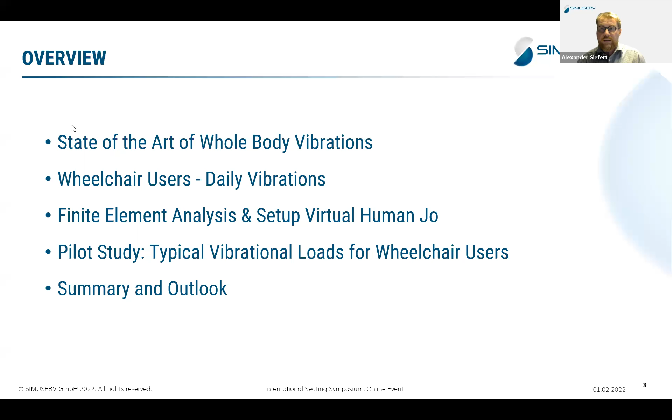So first of all, state of the art of whole body vibrations. Some general information, what is it and why is it necessary to look at that? And what are the setups in other industries? Okay, whole body vibrations occur in our daily life, in all situations we have. In traffic, when you're sitting in the car, you feel that it's a bumpy road or it's a smooth road. At working places, not all environments, not in the home office, but maybe if you're working on construction sites, you have that. And we know that from sport activities.

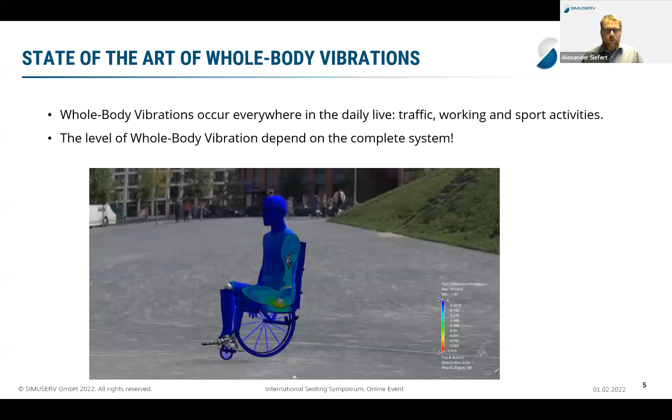And it is very important when you look at this kind of setup and how to analyze whole body vibrations, you have to cover all parts which are included. So here's a small video showing Joe going over a virtual setup. And by that, you can easily describe what is the complete system which has to be accounted for when you do the evaluation of whole body vibrations. Because here we can see all the parts of the whole system, which is first the surface profile of the road. Is it bumpy or is it not bumpy? Have we cobblestones or is it plain concrete?

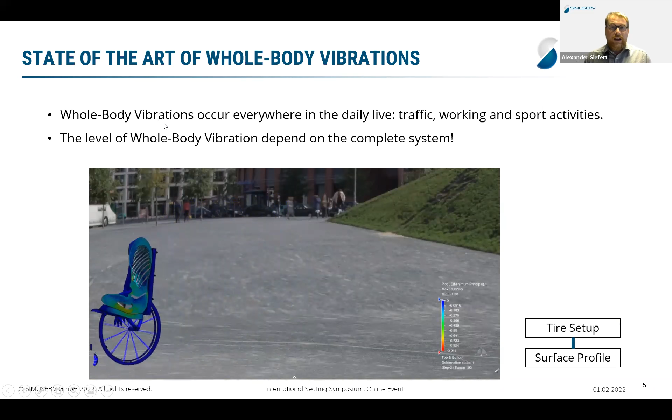Then on top, the tire setup. Which kind of tires are we using? Next, the frame. Is there suspension included? How is the cushion supported? And obviously, does the cushion itself have the capabilities to reduce the vibrations which are induced via the road and the frame? And finally, what is very important, if you do this kind of analysis, you have to include the human, because our human also has a dynamic behavior. And you cannot just put a rigid block on it. You have to put the human in to get the right level of the setup.

And when we later on discuss what we can do to reduce this for our customers, for our patients, we can focus on different setups. Obviously, as we will see in the second chapter, there are some standards defining what is a good profile for surfaces to reduce the vibrations which are induced by the pathway, for example, or the pavement. But the main part, what the manufacturers can do, is define the right tires, the right frame, and the right cushion.

Because we have obviously different kinds of humans, different kinds of customers, different kinds of patients, but they cannot be changed. The main part where we can influence the reduction of the tissue loads and the vibrations which are induced to our customers is the three parts we see here in red.

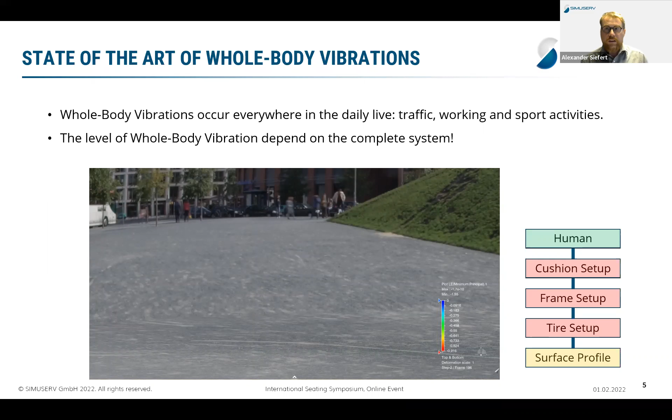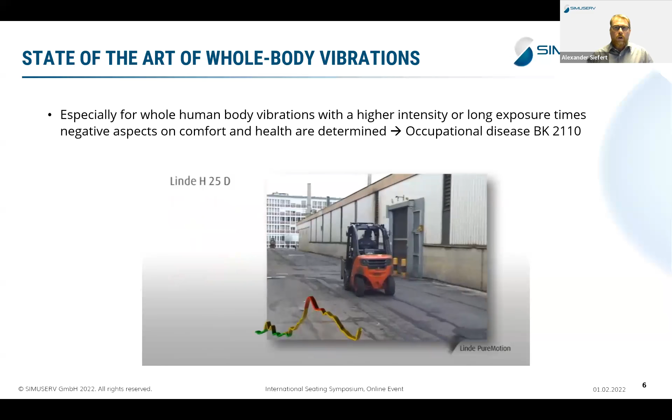So on this topic, I would say I've been in the field of wheelchair users at ISS or ESS or other conferences for about 10 years. And when I look at the exhibition stage, I have seen there are some comments about vibrations, but not too much. When we look at other industries, especially where we recognize higher intensities or long exposures of vibrations, then this is a very hard criterion for products.

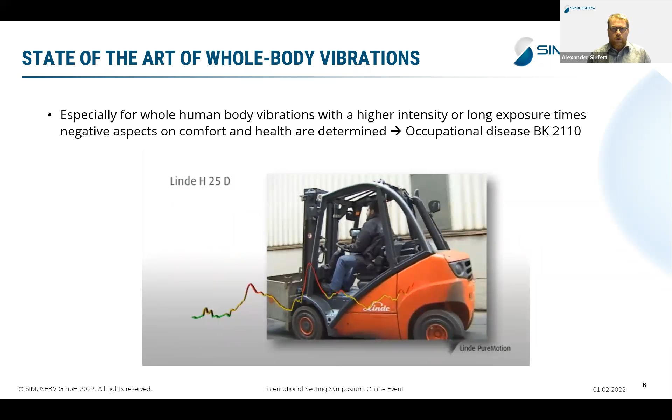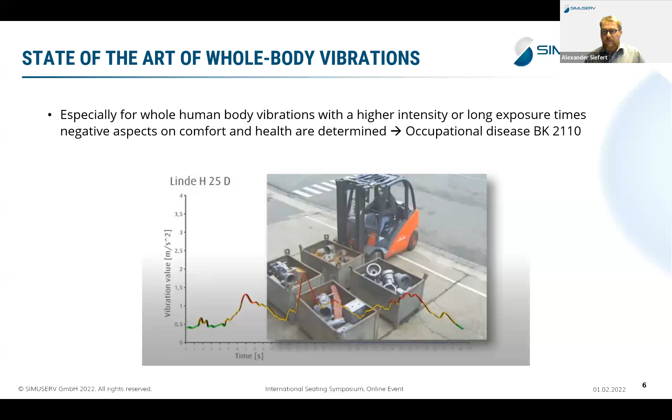As we can see here for a forklift driver, he's going over more or less a typical pathway which is normal for companies. And you can see how much shaking he has sitting on that forklift. Based on that, many studies started in the 70s, 80s, 90s, and it's known that there are negative aspects, not only on comfort, but also on health.

Especially here in Germany, based on some studies, we have recognized that forklift drivers and digger drivers have some disease, especially of the lower lumbar spine, some degeneration. And we have here in Germany an official occupational disease, BK 2110, where if this comes from your working environment, you get some money from the insurance company. I'm not really sure what the state is in the US or other countries, but I think it's the same for you too.

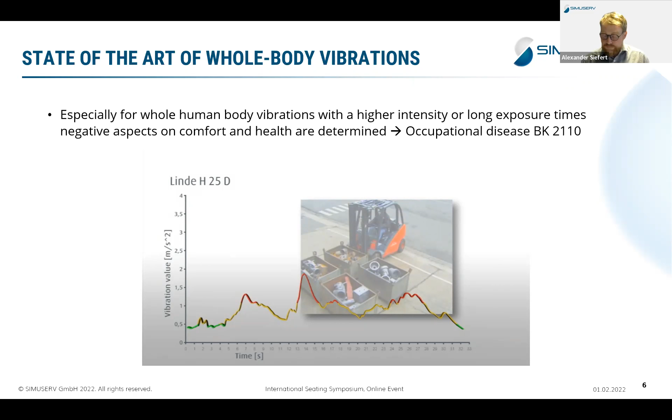Based on that, the EU, for example, has introduced some standards. In 2002, they introduced directive 2002/44/EC, and this defines a procedure for how you have to evaluate a working environment to make sure that your employees are covered against these negative health aspects coming from vibrations. And obviously all the manufacturers have to do that because they are selling these products and have to fulfill that.

So what is typically done in this procedure evaluating vibrations? Here we see a setup of a forklift, and you can see they measure the vibrations on top of the seat surface with a seat pad. A seat pad has a diameter of 200 mm. It's a rubber-like material, and in the center of it we have a small acceleration transducer, located here where we have the coordinate system. It measures in the specific area of the working environment where we have vibrations.

This acceleration data is post-processed with some filters on top, but this doesn't matter. So you have the right value of the vibrations at your working site. And then you have to combine that with how much time in an 8-hour working day your employee has this level of vibration exposure. If you have these two combined, then you can do the evaluation based on the standard.

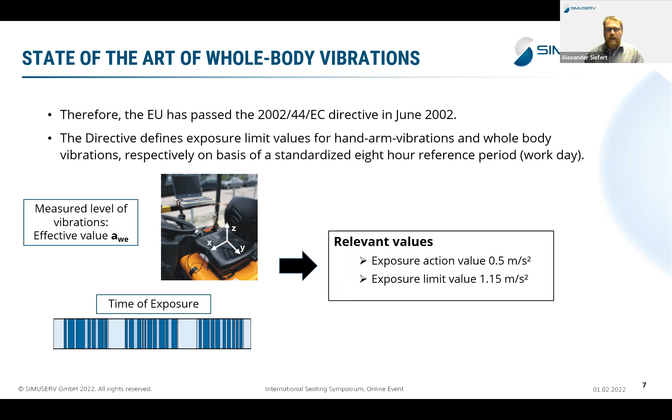And there are two limit values. The first one is called the exposure action value. It's a value of 0.5 meters per second squared. This means if you're below that, it doesn't matter what happens over the whole day. You don't have to do anything, no limitation on hours in that vibrational environment. You are fine. If you're above that, then the 8 hours are reduced based on the standard.

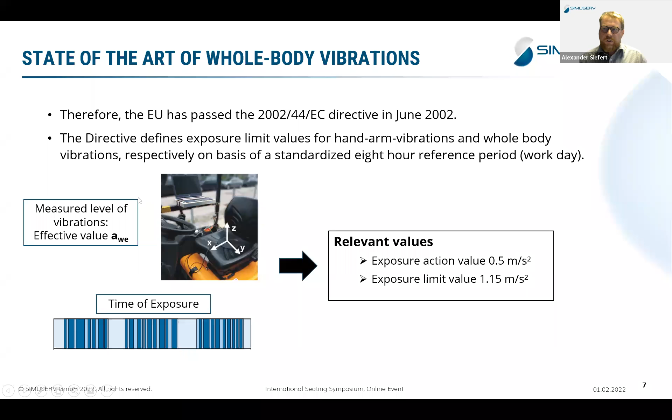The second part is the exposure limit value. It's about 1.15 meters per second squared. This means if this is occurring, then you directly have to do something against the vibrations, because it's known we have negative aspects. So you have on the one side the vibrational level, you have the time of exposure, and based on the standard, you get a plot like this.

We see here the green part, you are safe, the red part, you are not safe. On the x-axis, we see the time of 8 hours, and on the y-axis, we see the measured acceleration. So as I mentioned, when I have a value of 0.5, I have a green light up to 8 hours. If I'm above that, I have to reduce my exposure. And this is how you typically do it in this kind of vibration environment.

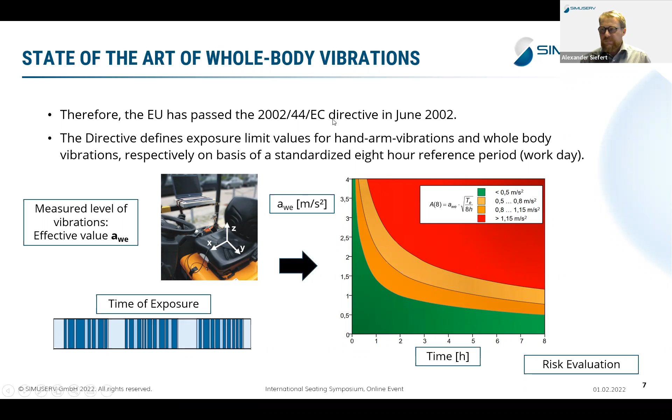So the question is, is this somehow useful for us, and how can we convert that information? There have been some studies, and this is where I come now to the next chapter about wheelchair users' daily vibrations. So I looked around in the last years at what studies have been published, and I really have to emphasize the most relevant work I found was the work of the University of Pittsburgh.

There have been several publications, and for my pilot project I was mainly referring to a publication of Wolf from 2007. You see the reference on the bottom of that slide. He investigated with different test persons 9 different pavements, which we see here. It's a poured concrete, which means a plain concrete, and then different pavements with different levels of joints, meaning the spacing in between.

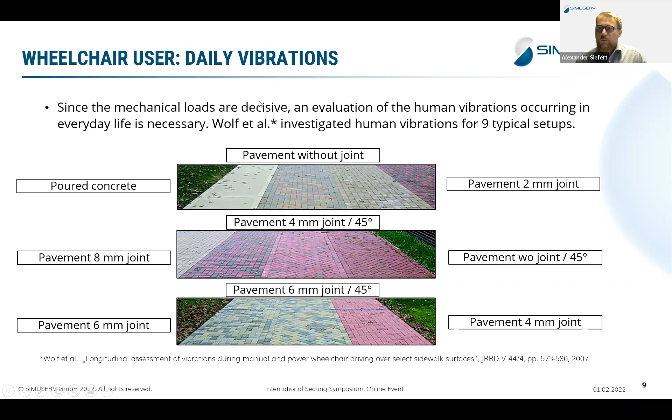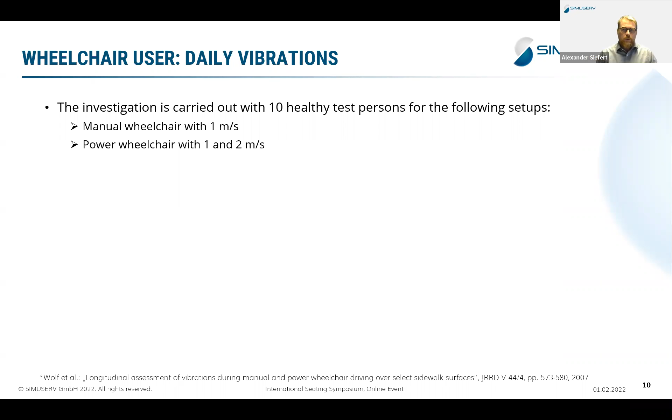And then he investigated these 9 typical setups with 2 kinds of wheelchairs. On the one side, he was using a manual wheelchair with a specified speed of 1 meter per second. And then they also investigated, with the 10 healthy test persons, a power wheelchair setup with first 1 meter per second, and then they doubled the speed to 2 meters per second, just to see the influence of increasing the speed. And most probably you already know what's going on when you increase the speed. And here are the results.

Taking into account what I mentioned before, the acceleration values here are called root mean square values. This is a specific post-processing of the time domain signals of the accelerations. When we look at the different setups and remember the limit values we have, 0.5 and 1.15, we already see that for the manual wheelchair at 1 meter per second, we have different states where we are above the action value. That means if I had 8 hours of this in a working environment, I would have to reduce the hours.

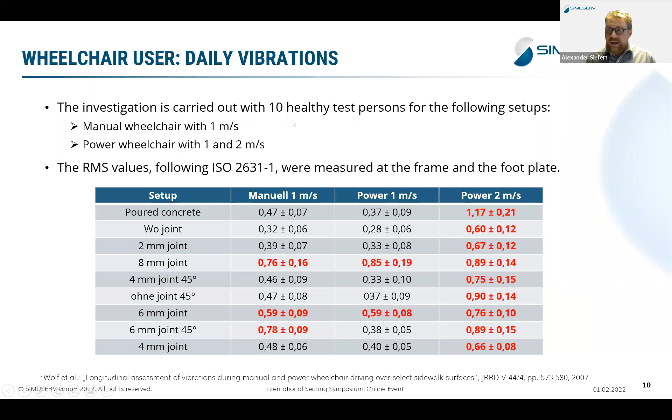And when we look at the power chair, especially at 2 meters per second, we see all of the pavements are above that. So that means you are directly not allowed to do that for 8 hours. Obviously, patients and clients will not do that for 8 hours, but you already see the daily vibrational exposure is not really low. We have to take that into account. So we see many daily setups are exceeding this action value.

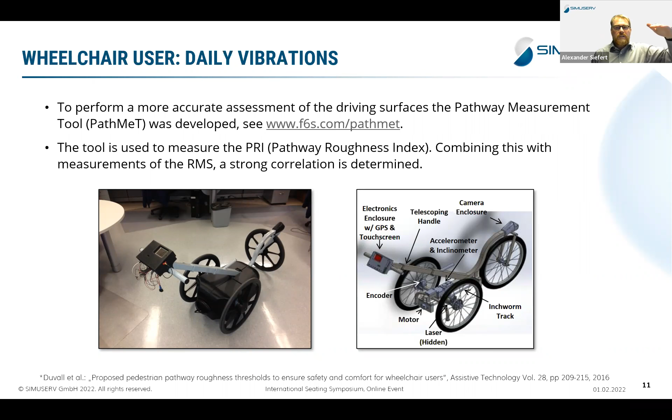So, based on that, they defined a roughness index, which describes how rough my pavement is. The goal of this study was: if I have this pavement and I can correlate it to an acceleration value, then I know my limits for acceleration values. I can also refer that to my pavement roughness and say, okay, this is a good pavement roughness. And this is what they did, as we see in the next 2 slides.

Here are some examples. The pathway roughness index, the PRI, is the vertical displacement of a wheel when running over a horizontal surface. The wheel goes in this direction, up and down, and this is how many millimeters of height difference you have per 1 meter. Here we see some examples of different setups: standard pavement as we have it everywhere, then a more concrete setup but with some bigger gaps, which is more or less an obstacle. We directly see that the PRI value increases from 30.7 up to 62.2. And finally, this was maybe some years ago a pavement like we see here on the left side.

After a while, a pavement is losing the setup, and based on that, you get a higher PRI value, which is here in this case 74.1 millimeters per meter. These are typical values, and at the same time they did the measurement of the RMS value, which we used for defining the exposure limit value, for example. And they found out there's a good correlation between the pathway roughness index and the RMS acceleration value.

Based on that, there is a new standard in the US, the ASTM E3028, where they say we have to make sure that for a new pavement, we should normally not come above 50 millimeters per meter for new designs. The idea behind that is, following the EC standard, the European standard, this would allow us to travel over this pathway for 60 minutes, which is maybe an acceptable time over the day.

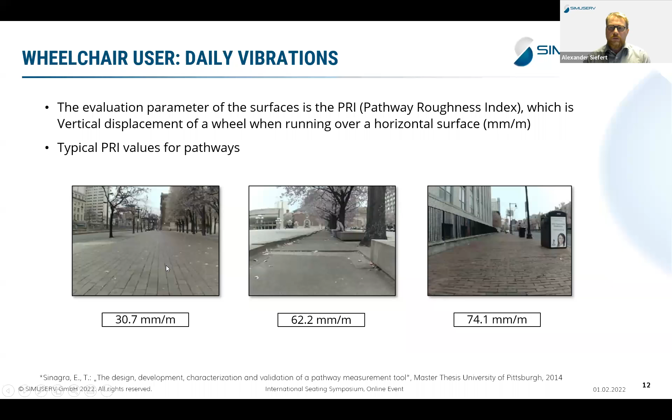But the question I have: if you do that design, what happens over the years? We have seen the two examples, going one slide back, on the left side and the right side. I would say after some years, this will change. So what happens after a while? I would say it's fantastic doing that and specifying that, but what happens after years?

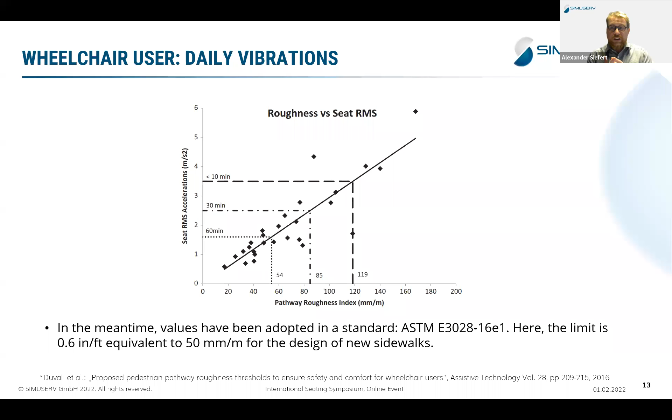Further, we're talking a lot about acceleration values. When we talk to customers, when we do evaluations of cushions, we normally don't talk about vibrational values or accelerations. We are talking about pressure. Sometimes, if you have a more sophisticated approach, we're talking about tissue loads, tissue strains, but not vibrational loads. So the question here was, what does this kind of vibrational load mean regarding tissue loads? Is this useful for us? Is this enough information? How is the transformation to our risk evaluation, normally based on the setup of pressure injuries?

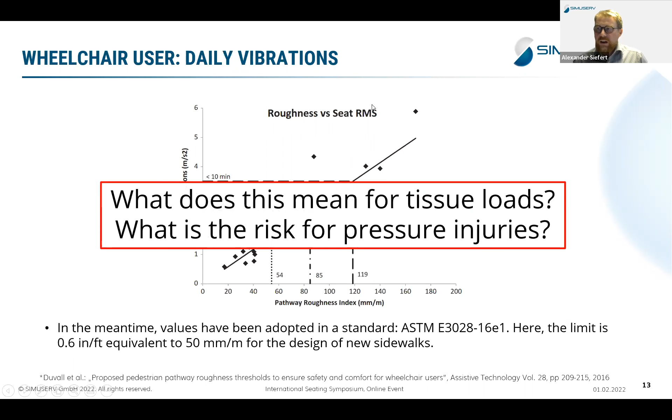For this, we carried out this pilot study. First of all, I will introduce the finite element analysis, our approach to get a more detailed investigation of the setup, and then I will tell you something about our setup of the virtual human, which we introduced in this analysis. If someone has joined one of my presentations at the last ISS or has seen a talk of mine, you maybe know this setup. Finite element analysis is a standard calculation tool used in many industries for simple or complex cases, as we have here, to evaluate designs.

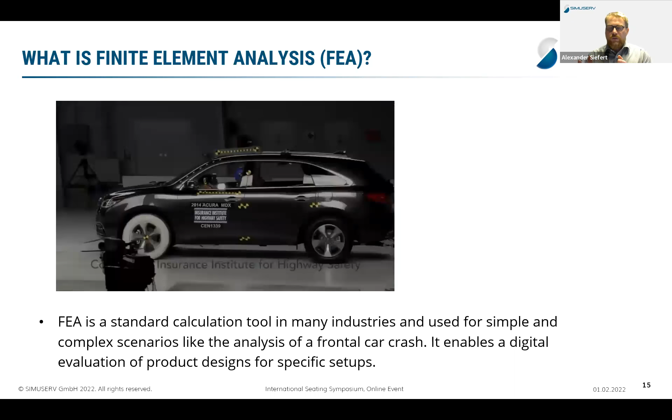In this video, we see first, starting now, a real car crash. And the second part is already virtual. What is the benefit of virtual? We can see at every second how the structure behaves, which column fails, where we have to increase material, where we can reduce material, where we put more stiffness. So the benefit of FEA is it's virtual, we have no hardware. You can imagine for this kind of setup, this is really costly.

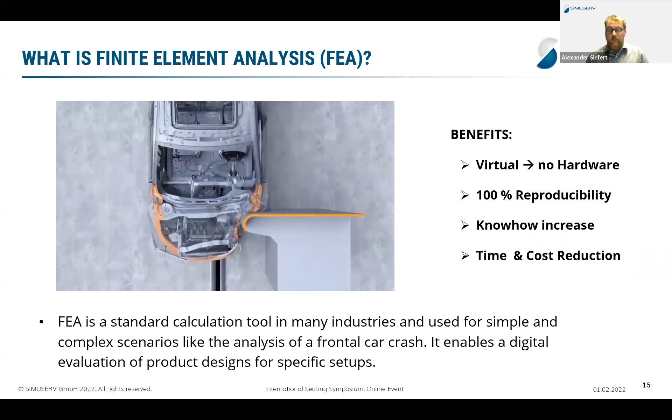Hardware also means if you have a new wheelchair design or a new cushion and you want to change that, you don't have to produce it. You can do it virtually, and then say, okay, if this is fine, then I will produce it. This is a general benefit. Another benefit, maybe you are aware of, is you have 100% reproducibility.

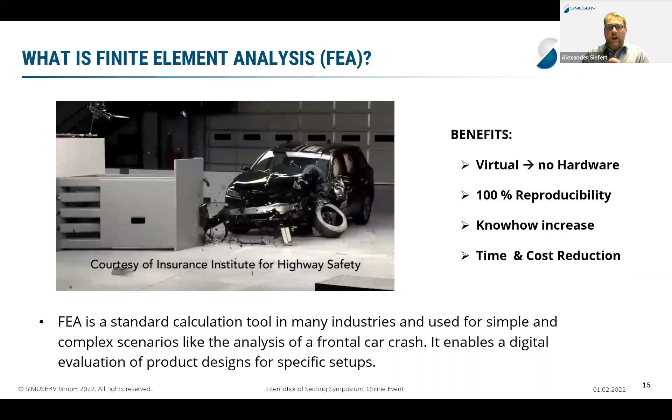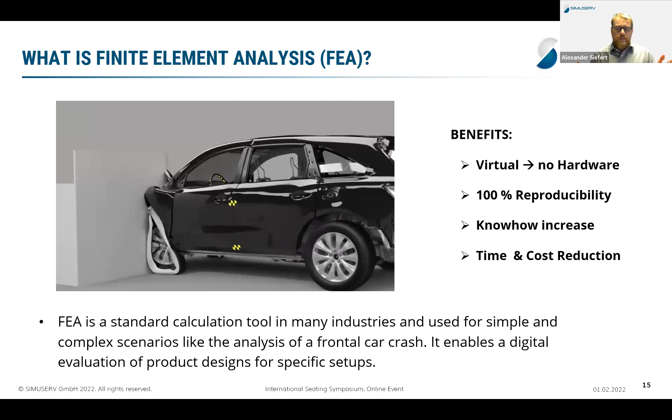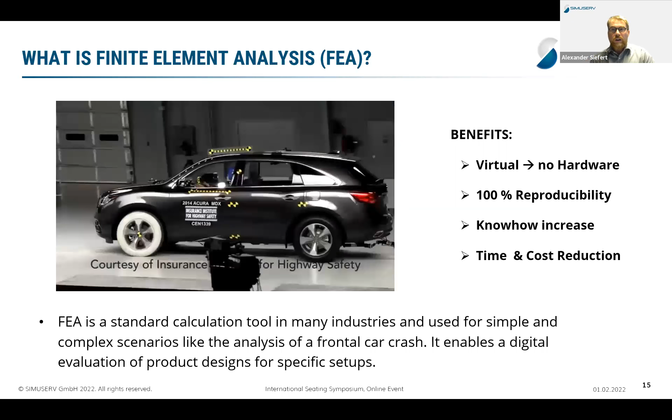Let me make a simple example. You have a customer and cushions A and B. You do the cushion A test before Christmas and the cushion B test after Christmas, and then you have differences in the result. This is an example I used many times in the automotive sector, because we know we change a little bit over Christmas time. The question is, when we changed weight, when we have been skiing, when we got more relaxed, will this influence the results between variant A and variant B of the cushion? Yes, it will. So in real hardware setups with test persons, you don't have 100% reproducibility. Here, if I do the analysis again, I will always get the same result.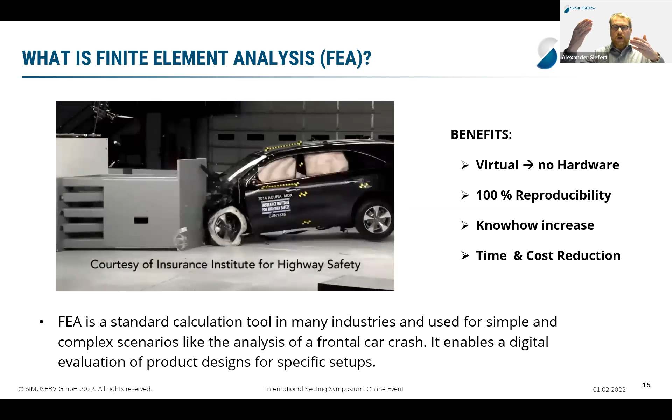If I change something in the setup, I will see a difference. So that means I get a direct correlation between change of the setup and the results. And this makes it very easy to see, okay, this is a benefit or is not a benefit.

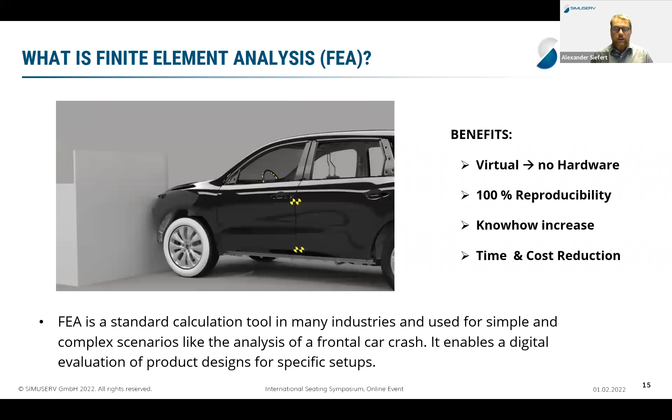Further, as we can see here, and you will see that hopefully later on and understand it, we can somehow increase our know-how using that kind of virtual tool. And finally, less hardware means reduced time for setting up a new system, and this means obviously reduced costs.

So when I look currently on the status, I see, okay, we have many standards which are specified by indenters. Also, I know manufacturers are doing test setups. And just looking what I described before, which works, which does not work. I will not say that I directly want to exchange real test persons with virtual world, but I will just show some parts where I think if we combine that in a good manner, then we have a benefit for everyone, for us.

So reproducibility for the ISO standards with the indenter test, yes. For test person's test, this is not a real test person, but this setup, not really, but it's a real case. It's a real case if I have the right person here. This is more or less, I would say, no one of us has a rigid buttock, so this is not really a real scenario.

Evaluation quantities: we have pressure maps, yes, but if we have not the right buttock, what we take out as a message of that? It's just information about how the cushion behaves with a rigid indenter. It's nothing about the interaction between the human body and the cushion.

And very often we look here on force deflection curves. This is a global value, but sometimes it's more interesting to look on local setups. Digitally, not really the case, although this is very simple to do as a digital setup. Time and costs depend: if you are fast in hardware manufacturing, obviously not a lot of time, not a lot of costs. If it takes a while to make a new setup, then you have really some problems about that.

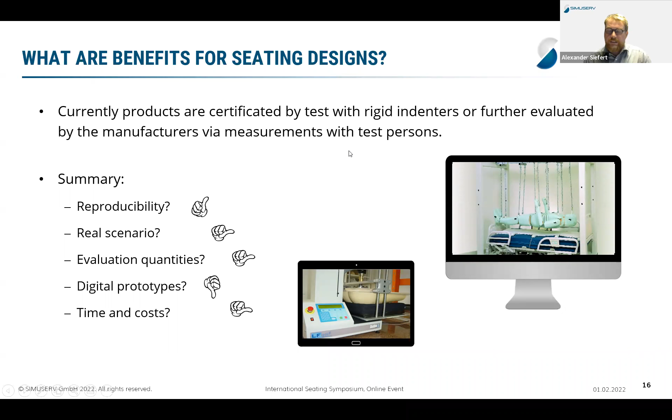Okay, so then I did a small example just this Sunday morning, just to explain a little bit more. Okay, what can we do? I just did a foam setup, a cubic foam setup, 50 millimeters height, and just put on top the ISO indenter. I just want to explain to you, okay, what could be the benefit? And this was an amount of hours for me, 1 hour.

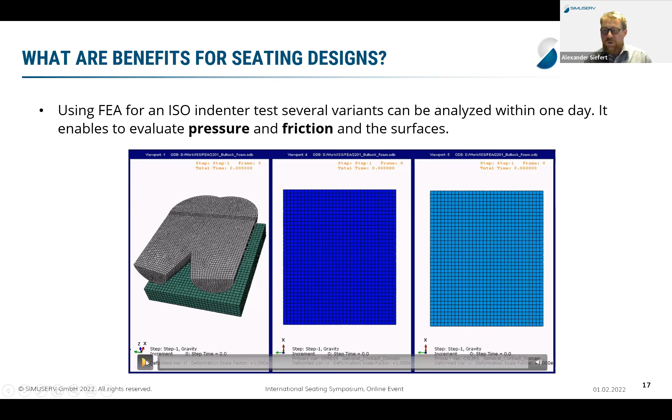I first just applied the 800 newtons. And then we looked here in the middle, we look at the pressure map, you say, okay, nothing new. I could also show you a force deflection curve, nothing new, we can do that. But I can also look on the friction.

What means the friction between the indenter and the setup. We have some specific ISO indenters with some specific sensors. This is correct, but we have not a resolution like we have it here. I can do really resolution similar to our pressure map resolution, just showing you the friction. This is very interesting when we look, for example, at the IT region.

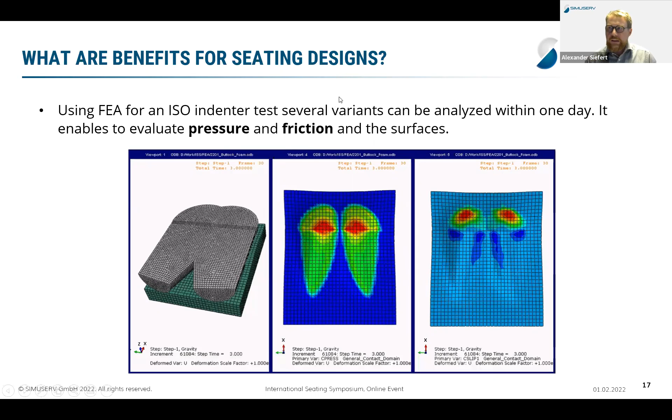And another thing I did, on the left side is the typical foam block. And then I said, okay, let's see what happens if I cut the foams, because there are many setups out there. Doesn't matter if it's an air cell cushion or a cut foam, where we have a change regarding that. And I just did the same test, first loading vertically, and then I did a horizontal movement to see what happens to the cushion.

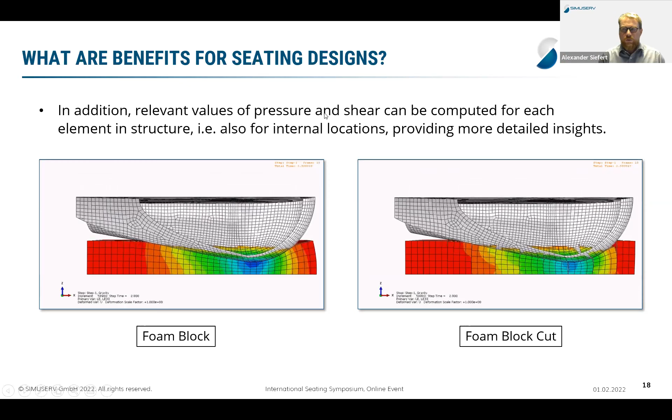And this is a cross section at the sagittal plane. This is what I say, okay, I can directly look inside how the cushion behaves. On the left side, the typical foam block, it's not really difficult to understand. But on the right side, this is also done within 1 hour, you directly see, okay, how the blocks behave to each other.

And I can easily change that to make the blocks wider, smaller, change the geometry. So a lot of possibilities. And this is what I say, there are manufacturers out there who have this kind of setups, but I think they have an idea how it works, but they have not really the background, the mechanical information for that.

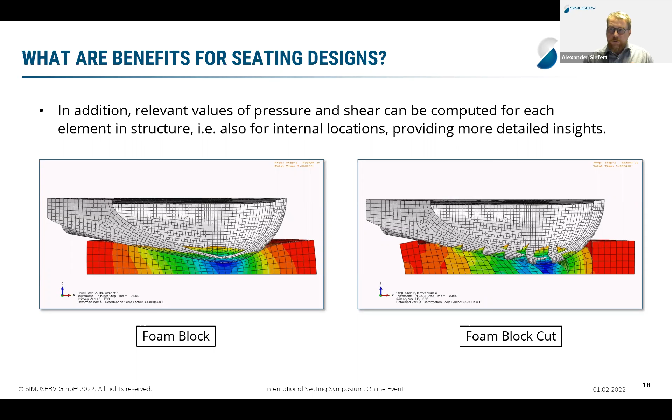So this is a benefit, an easy example on the ISO standard test, where you can see finite element brings you an additional knowledge.

Then I come now to the human body model Joe, which I use. It's presenting a healthy person, I'm clear this is not the real patient, I will tell something about that later on. It's a male, 50th percentile, based on a CT scan for skeleton, MRIs for the layer setups, body scans for the outer surface. We have some additional information for the tissue, and that's the general setup.

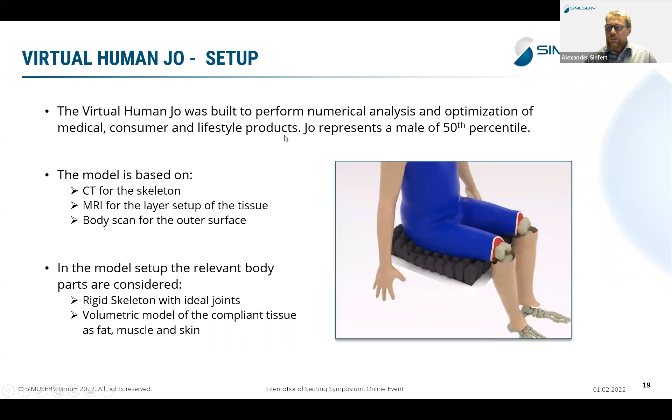And here we see it in interaction with one cushion. So, what is important when you do that model?

The modeling, especially regarding vibrations or seated setup, needs a very accurate model of the tissue, but especially a very accurate modeling of the lumbar spine, because the lumbar spine is where we have the trunk, we have the head, and all the load typically in a seating process is transferred by the lumbar spine to the pelvis, and the pelvis is finally the supporting part. So I would say it's the main load transfer column we have.

And it's also very flexible, especially the lumbar spine, so we really have to model that in a very specific way. I will directly show you in one or two slides why it's also important to have a specific detailed model for the analysis of the dynamic setups.

Another point you have to consider is muscles would be nice. If you don't have the muscles, maybe you need some belts to keep you in place. If this is not the case, you should take into account in the modeling some muscles.

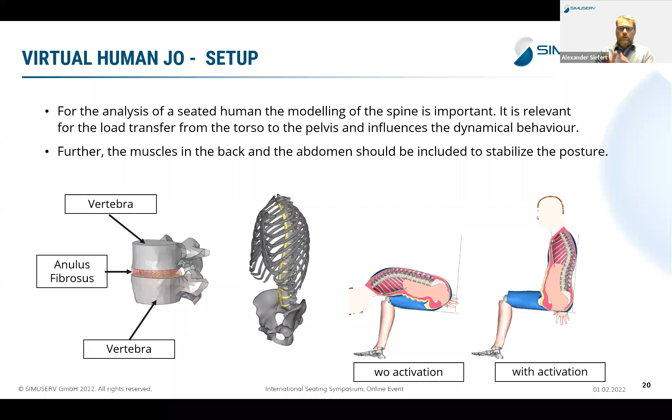So this is the model. I have only modeled some of the back muscles, some of the abdominal muscles, without any activation. This is just showing the same model with some activation to keep the neutral shape we have for the spine, and you can vary that. So this is another point you should normally consider.

What you do with this kind of modeling setup, you have to validate it. Obviously, the first setup is validation by pressure map. Here, comparison of 9 male test persons in a range of 74.5 plus minus 2.6 kilos. We see the pressure maps, and on the left side this is the result of Jo. I would say this is an acceptable result, so we can start using that.

We did also do some further quantification validation when we looked at the lumbar spine. There's some data when you do just a segment L4, L5, how much is the deflection, and this also works fine. It shows a good correlation.

So coming now maybe to the comment, okay, this is a healthy person. You're right, the difficulty is with our patients in this industry, it's difficult to get data, difficult to get the right setups. And then if you model one of the patients, you have only one specific patient. And the goal here for this setup is not really to make an individual setup, but to have some general recommendations if a design works better.

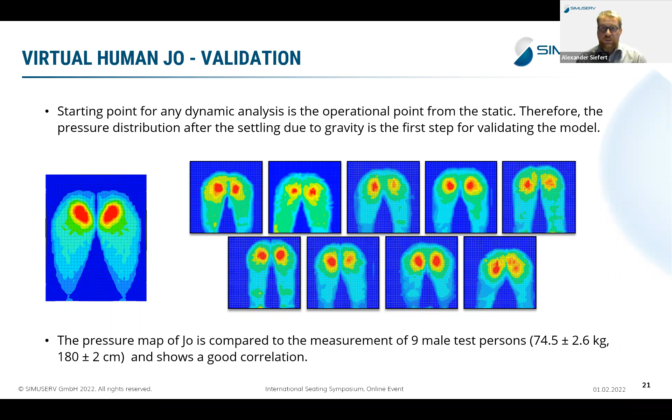Because if I can show for a healthy person that the vibrational level is reduced, I can also say, okay, I assume this is also the case, maybe not the same amount, but I can say this design is for this setup better. I assume that's also for our patient better. And that's the idea - hopefully in future it's getting easier to get some data of the patients and to develop some patient-specific models.

Coming now to the difficult part, and here you can see I'm an engineer. I'm sorry for that, but that's our nature. So, equations.

I described the whole system, and I said you need the human body on top, because the human body has some kind of dynamics. And it's known there's a value which is called the apparent mass. The apparent mass is a good value describing our reaction to applied body forces.

What we see in this slide is a test rig at the FIOSH in Berlin in 2008. They applied some forces here to a rigid plate - actually they applied some accelerations, not forces - and then they measured the reaction forces on the force plate.

And based on that, they defined - normally, force equals acceleration times mass. They said, okay, we will convert that to mass is equal to force divided by acceleration. And they found out it's very well known that individuals of specific percentiles have very similar characteristics.

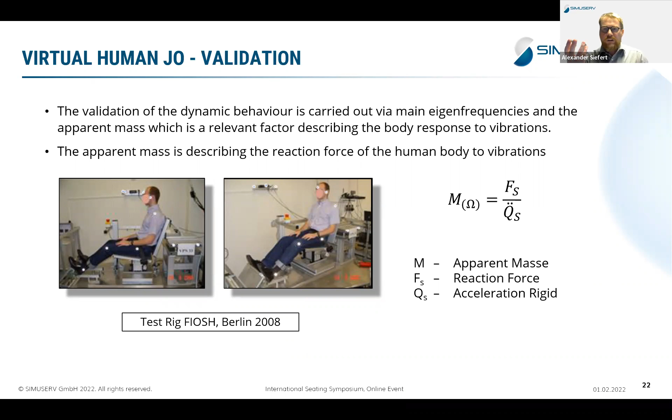Therefore, it's really important, as I said, that you need a detailed model of the spine to cover that. Because if you had a rigid block here, you cannot assume that when I put it on top of a wheelchair I get a realistic result compared to when a human is really sitting on a wheelchair.

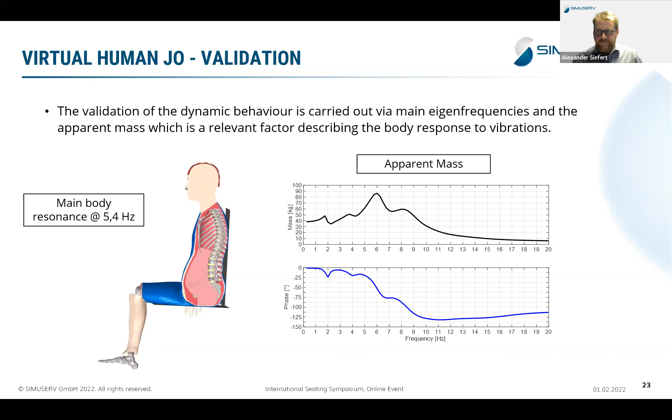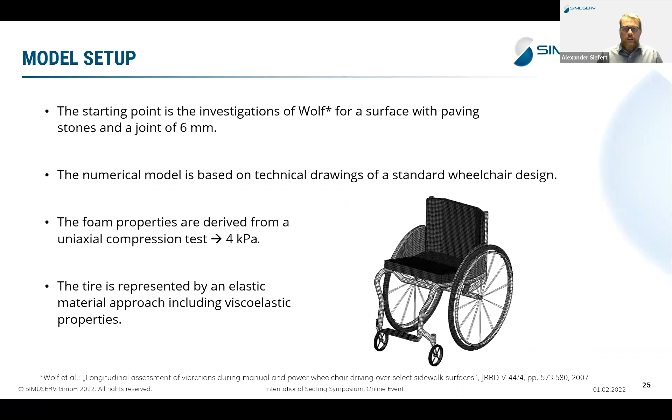So, enough of theory, now going to the pilot study. The goal was to do a setup somehow similar to the measurements of Wolf, then use finite element analysis to see if we are close to the vibrational levels, and then focus more on tissue loads rather than accelerations. First, we modeled a manual wheelchair based on a technical drawing, with standard foam, nothing specific. We're not highlighting any products here; we just want to get knowledge about what works and what the benefit is for us.

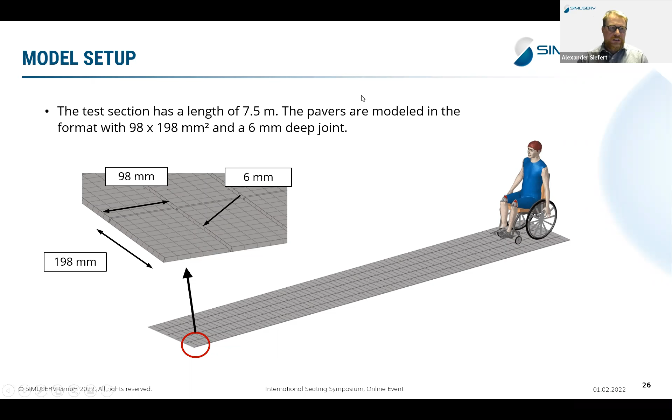Then we modeled a pavement like we saw by Wolf, typically stones with a width of 200mm, length of 100mm, and a 6mm joint. This is one of the setups. We modeled the pavement with a length of 7.5 meters, then sped him up, first letting him settle down.

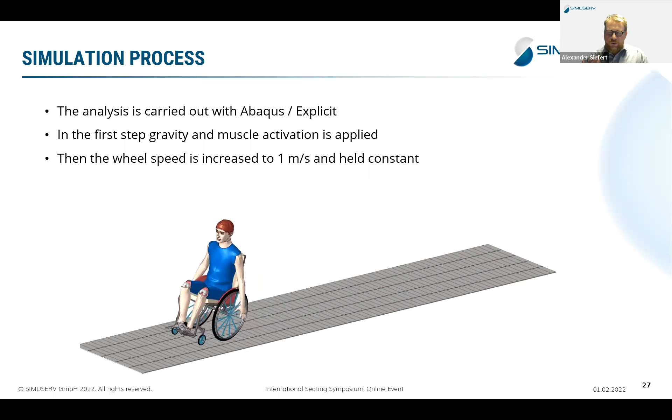For this analysis we use Abaqus Explicit. We let him settle down - at the beginning the wheels need some friction to start. Then we speed him up to 1 meter per second and keep the speed constant as he moves over the pavement. This looks very close to what we see in the measurements of Wolf.

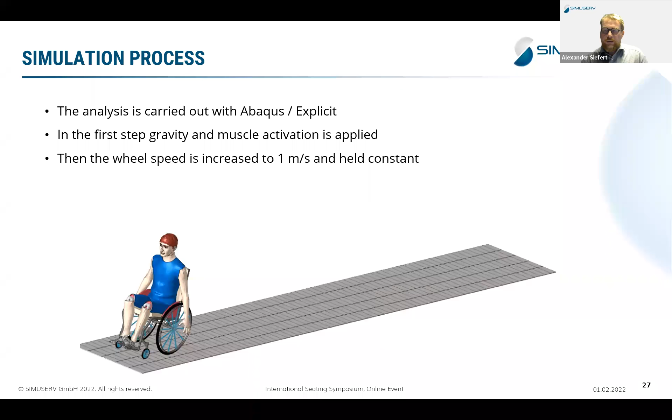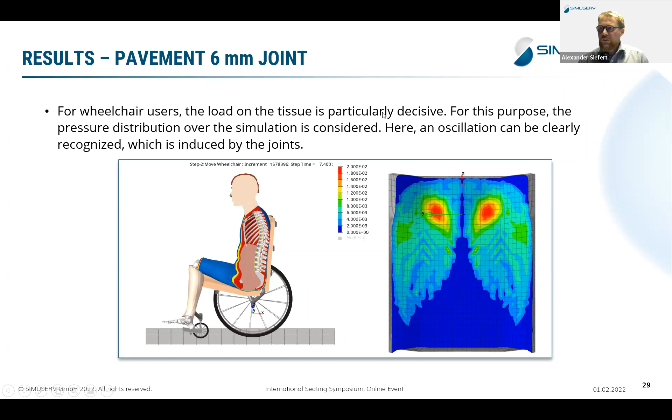So what does it mean for the tissue loads? And the question was here, we see there's an oscillation, and when you normally have an oscillation, this means you start from a point and you go up and down and up and down. And the question was, okay, when we look on the pressure map, how much are we going up? And this is just comparing here on the left side, the static after we settle down due to gravity.

And on the right side, we see, hopefully it's correct. Yeah, I will just show it by the mouse. This is the maximum of 6 millimeters. And this is after the static loading, just applying gravity. And we see it's an increase from 1.7 to 1.97 newtons per square centimeter. I will just convert it to typical values for you. This is about 150 millimeters of mercury. And this is about 130 millimeters of mercury.

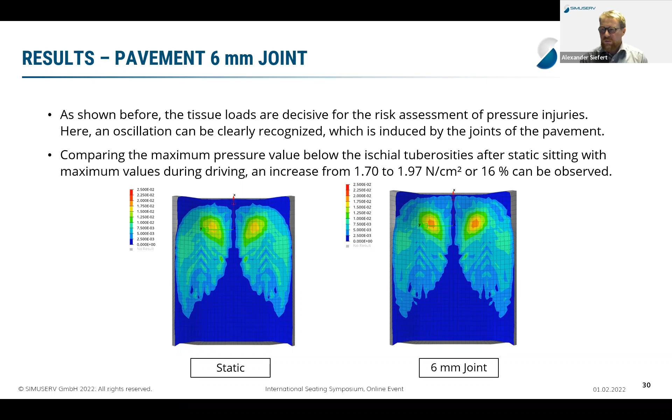So it's a difference of almost 20 millimeters of mercury, which is, although we have a very low vibrational value, an increase of 16%, which is not really a small difference. So then, I said already pressure mapping is no problem. On top, we did some computation of what's going on with the internal tissue. So we have a possibility that we can compute at each setup the tissue load internally. And you can see that this is the settling down process, and we call that volumetric strain distribution.

When I stop that here, so let me just go here. I will stop that finally. So this is after settling down of gravity. And then internally for each part of the volume, I can say, okay, you have compressive strain of that amount, you're going to this range, or that. And then I can separate the volume, and we focused here on the IT area. Okay, how much of the volume is in a specific threshold, which is critical? Because there are some critical values.

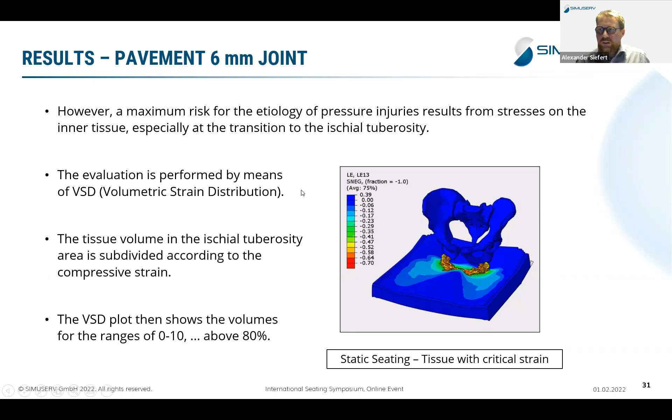There are some studies of Willeke of 2018 that say, okay, below 50% of strain, no problem. With some tests between 50 and 80%, this could lead to necrosis, but we are sure if you're above 80%, then directly in a short time you have some damage, which is not even reversible for the tissue. So this is the point.

And what we did for each state, settling down, then we did how much of the volume is between 0 and 10, 10 and 20, 20 and 30, 30 and 40, 40 and 50, 50 and 60, 70 and 80, and above 80. So we compute for each setup how much of the volume of the tissue is in these different strain ranges. And then we can really give a value.

And based on that, when we now compare the two designs to each other, we've seen, okay, it's only 16% or 17% of increased pressure peak. But when we look internally, we see it's much more, especially for the critical range. So maybe the pressure setup is not enough information. If we use that, we can really see this is much more critical than the previous setups. And this helps us get a better understanding of the risk of the vibrational loads.

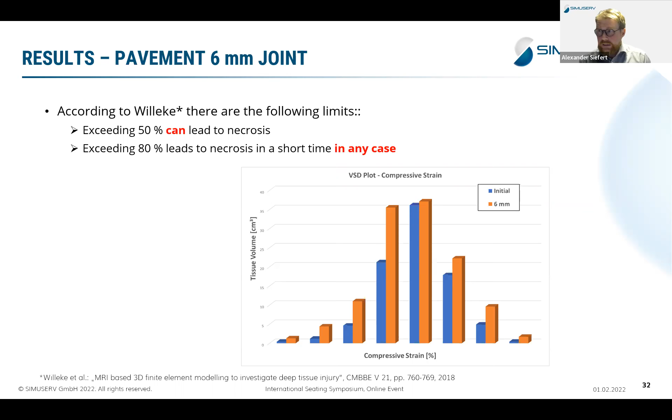This is just a summary. And the comment is we have 0.31, no action, but still we see here a strong increase. So what does it mean? Is it not covering the risk? Should we do something? And this is a point where I would say, okay, we need some deeper insights and we can then make a decision, okay, let's look at the design and let's improve.

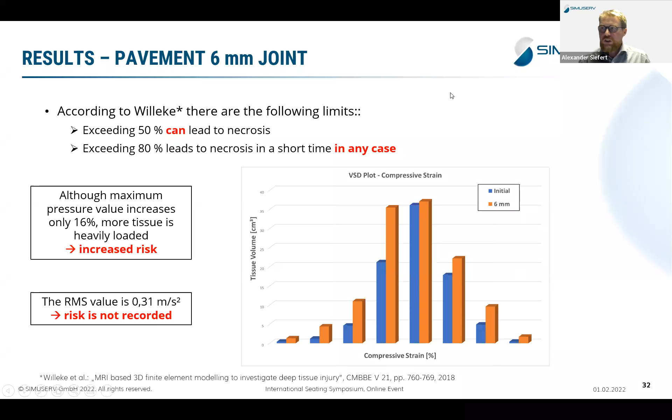But this was only the first part. We were then interested in what happens when we changed the vibration. We did 3 additional cases. We put some cobblestones. Maybe you remember we had this loose pavement with a IRI value of 70, 47.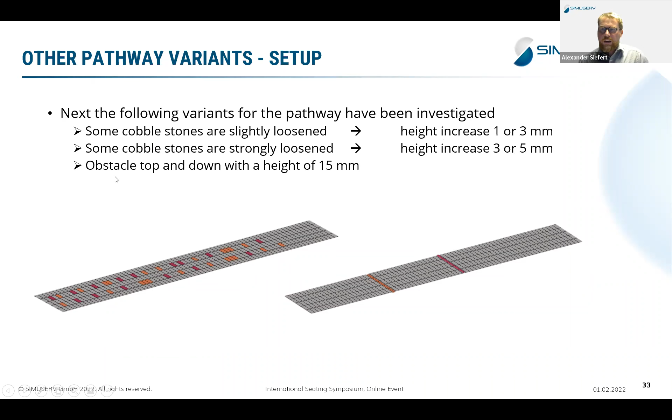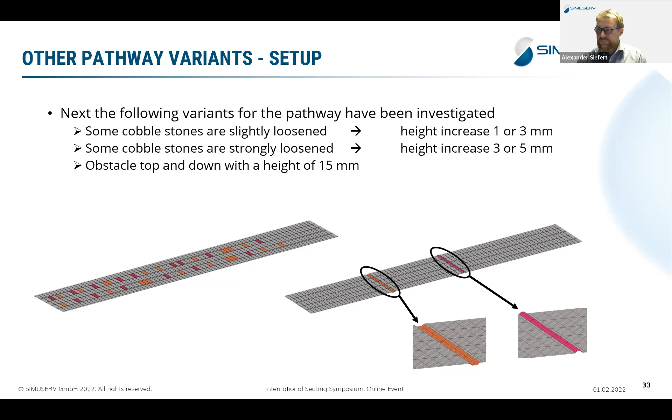You can see that here in detail, our obstacle which is going 15 millimeters up and another obstacle which is going 15 millimeters down. So this was maybe the example of the pavement we have seen in the middle of the previous slide. And here this shows now, once again, a cross section. Cobblestones have been not so nice to visualize. I was focusing on the obstacle. Once again, now the obstacle comes, you go over it and you see what happens to the pressure map.

I think this is maybe interesting. We assume that. We also see that here the obstacle going up has a much higher influence than just going down. I will just repeat it. Oops. Sorry.

So he's turning the wheel to get the right speed, to get the right friction with the pavement. And then very, very fast now the obstacle comes. The front wheel is going up. We already see this is an influence, but then second point, he's really just bumping out of the seat, and you can see a strong increase of that. And the question was, okay, what does it mean for our values?

First, we just did it as before, RMS. This is just showing us the buttock value, and for all 4 variants. The dark blue, almost close to an acceleration of 0, is the initial setup with a joint of 6 millimeters. Then the green and the blue ones, these are with the cobblestones with a different height of 1 and 3 and 5 millimeters. And then you see the obstacle.

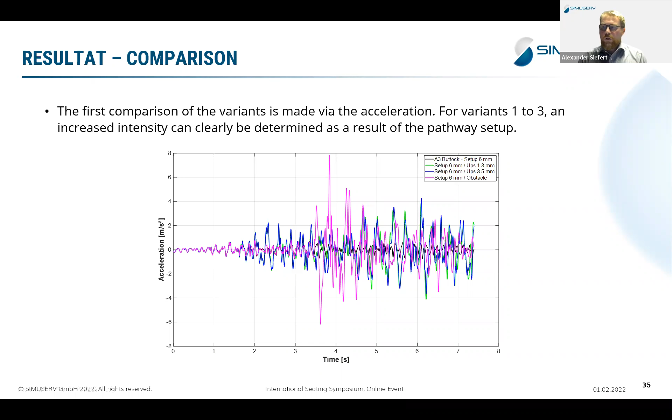The obstacle is directly here. You can directly see it. At the beginning, nothing happens, and then the obstacle comes, and it's really so. And the question is, what's going on with the RMS value? And then we looked on that, and directly we see, okay, if this would be the case, this would be really a strong increase.

And normally you directly could say, using the typical standard, okay, we need some action here. In this case, also, it's not allowed. You have to do something against it. But the question, could we really prevent that with the standard measures? Can we say, okay, you are not allowed to put an obstacle of 15 millimeters on a pavement? But the other question is, can we not just use that information and do something?

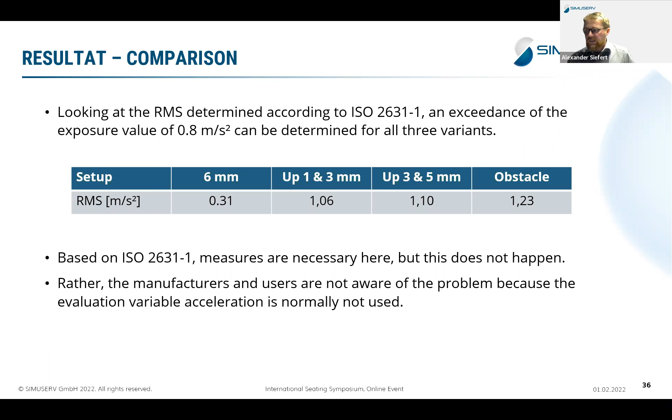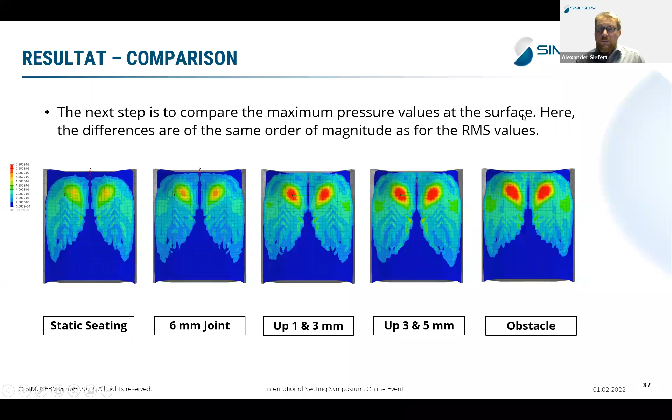But in my opinion, when we talk about this topic with the manufacturers, with the users, they're not really aware because they cannot transfer this information to typical risk values. This is something I mentioned before. And so I'm coming back to pressure maps. Pressure maps here showing for the 5 setups: static seating, 6 millimeters of joint, up 1 & 3, up 3 & 5, and obstacle. And directly you can see what you imagined. Okay, slight increase, strong increase, very strong increase, but only one peak.

And then we converted that to a pressure value. The previous relation was just computed with 100% static. Now we said, okay, we want to use a dynamic setup with the 6 millimeters as 100%. And then let's see how much the pressure maximum is increasing. And we see the obstacle is about 80% increasing. So this is a really strong value. And maybe people already say, okay, this is a strong value, but we don't really understand it.

But if I would tell you, okay, here we have about 150 millimeters of mercury and 80% on top, let me just count, this is 270 millimeters of mercury. Then people directly will say, okay, we have to do something. Can we reduce that? How can we reduce that? What happens if we use a different cushion? What happens if we use air tires? What happens if we have a suspension? So these are possibilities. People understand that.

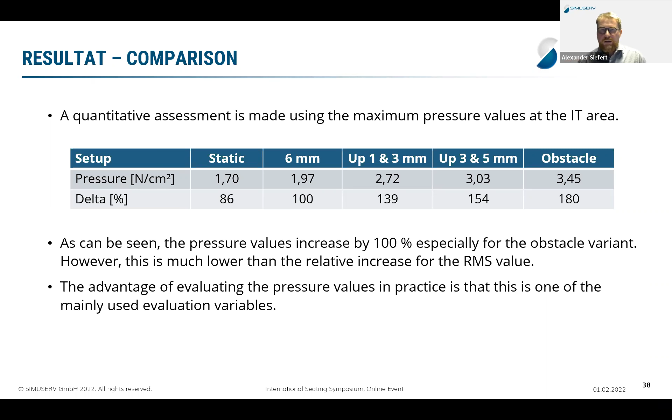And to make it more clear, I just computed there also the compressive strain with the VSD plot. You see 60 and 70% is not really something happening. But then just look on this where I said, okay, typically is this the case in a short period?

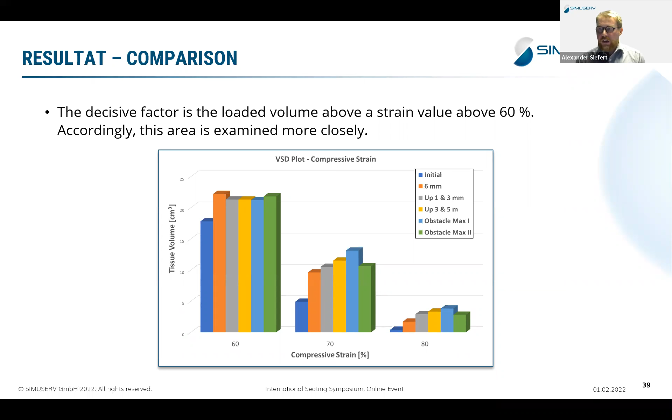So you don't have to have that 1 hour. In a short period, then you have a risk of cell necrosis. And we look here, initial, not really, this is, I would say, a numerical effect, but we see already 6 millimeters increasing, but we see especially for the obstacle, the max increasing setup, this is very critical. And this is the point where I said, okay, let's discuss that, see what we can do here, how we can improve our setups based on that.

So here, once again, the numbers, you see, this is a very small number. When you do this kind of finite element analysis, you can say, okay, not really take that into account. We have to focus on bigger numbers because we have some tolerances there. But when we compare 6 millimeters with the obstacle, it's always a factor of increase 120%. And this is really something very critical.

We have to think about what we can do just to get an understanding that this is a risk for the patient. This is a risk for pressure sores. This is just to get to the community the understanding that vibrations on top of a standard procedure is an additional risk. And we should at least be aware of that. And if we have some possibilities to work on that, then we should do that.

Because imagine, I said, you have tires, you have frame, you have cushion. Mainly we are working on cushion, say, okay, we have a big difference. But let's assume we have for both cushions this kind of increase, which is not the case. And let's assume I can use air tires instead of rubber tires. The question is, what is more effective for vibrations? Is it change of cushions or is it tires? And are we playing too much in cushions and not considering tires? Would it be not better to have tires and cushion optimized, or frame, tires and cushion optimized? So this is the question I come here.

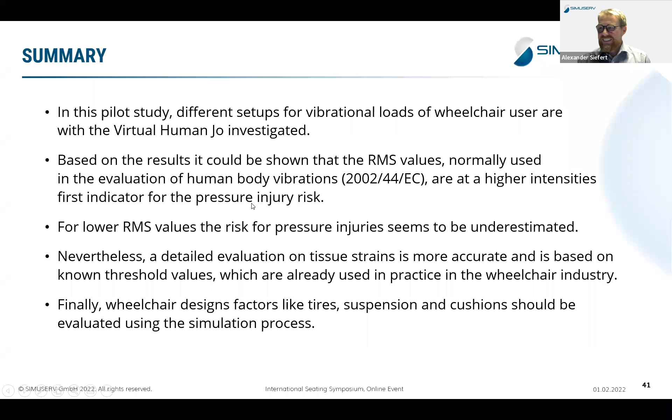And then there's another question that came in. Do you think modeling provides more value for monitoring vibration dosage, etc., pertaining to wheelchair suspension, such as coil over oil damped shock absorption? Go ahead. Can I see the question also in my chat? Yeah, you should be able to. It might be easier to read.

Dosage, if you understand it like I do, I will just explain that. Typically, when we look at, as Patricia mentioned, impact, impacts are counted differently in the RMS value than lower levels of intensity. It depends a little bit on what kind of impact you have, and you normally call it dosage. Here we have root mean quad. It's a higher level of power you take into account, because it's assumed that you cannot just count the impact like a lot of smaller vibrations. One strong impact is not the same as just counting a lot of smaller vibrations. You get a higher level of that.